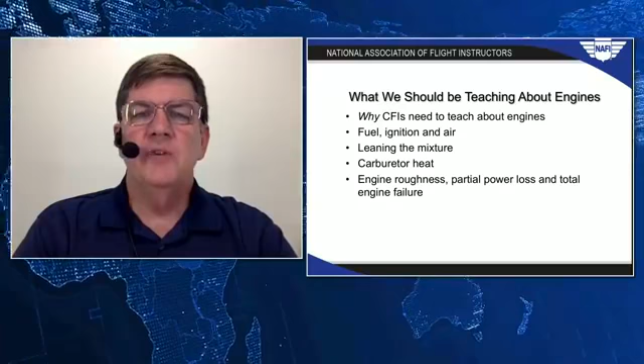In this webinar, we'll review the reasons why flight instructors need to teach students at all levels about engines and engine management. Specifically, we'll cover what engines need to run and how to get what they need, leaning for takeoff, climb, cruise, descent, and arrival, including high-density altitude conditions, using carburetor heat, including the unusual initial results of carburetor heat use, and how to properly respond to engine roughness, partial power loss, and total engine failure in flight.

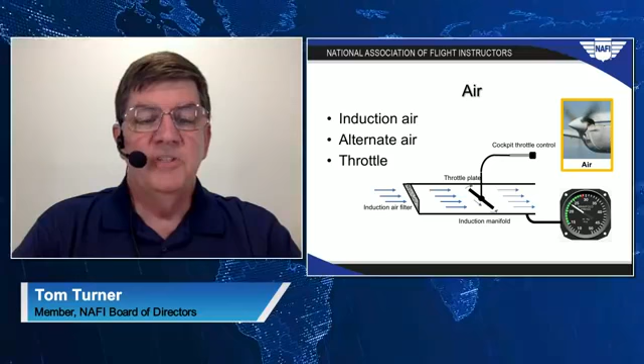The cockpit throttle control moves a throttle plate in the induction system. The position of this plate determines how much induction air is sent to the cylinders for combustion. We talk about opening and closing the throttle.

When the throttle is fully forward to wide open, the throttle plate aligns with the airflow and lets almost all of the air pass toward the cylinders. When the throttle is closed, the plate blocks the airflow almost completely.

The amount of air sent to the cylinders is the main means of controlling the engine's power output. If the airplane has a manifold pressure gauge, the gauge measures the air pressure in the induction system as changed by the throttle position, and it is the primary means of indicating power selection. As long as the fuel flow is correct for the amount of air in the cylinders, we'll talk about mixture control shortly, the engine will develop power.

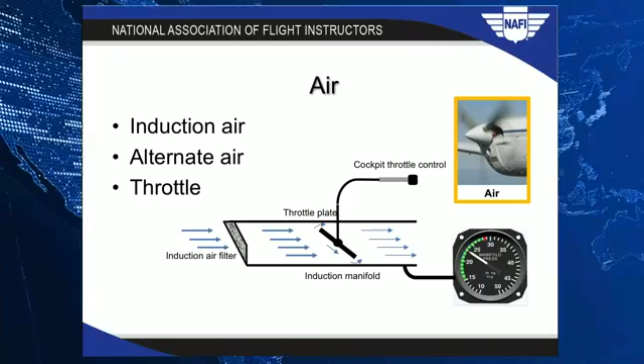In carbureted engines, carburetor heat is a form of alternate air. Carb heat takes hot air from the engine exhaust and emits it into the induction manifold ahead of the throttle plate. Carb heat is designed to prevent formation of ice on the throttle plate and, to a lesser extent, to melt ice off the throttle plate if it has already formed.

Because heated exhaust air is less dense than cooler ambient air, when you apply carb heat, you're reducing the amount of air available for combustion. That's why the power drops when you apply carb heat in your pre-flight check. We'll cover the use of carb heat and the indications that result later in this program.

The ignition system provides the spark that ignites the fuel air charge in the cylinders. Magnetos are mechanical devices attached to the engine accessory case. As they spin, they create short electrical pulses that travel down wires called the harness to the individual spark plugs in the cylinders. The timing of these sparks is set to follow a pattern

that alternates between cylinders and occurs at a time in each cylinder's power stroke, so it ignites the fuel and air at the optimum time.

Magnetos do not need the airplane's electrical system in order to generate spark. As long as the engine is turning, the magnetos fire the spark plugs. This is usually done with a battery-operated or pneumatic engine starter to get started, but it's also how some small engines can be propped by hand to get the ignition started.

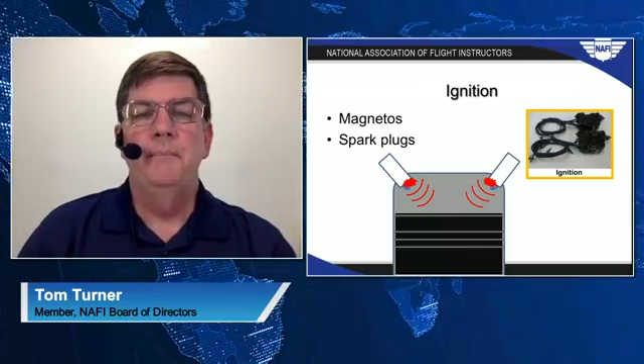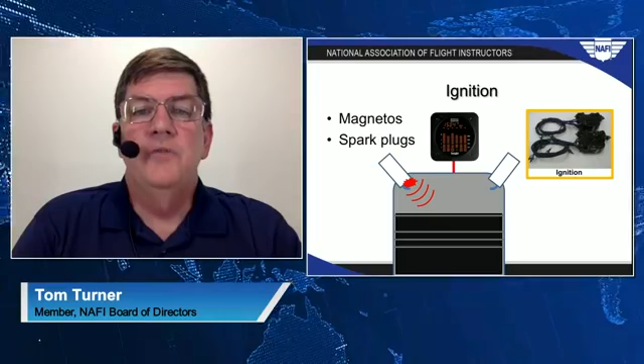If the airplane has all-cylinder monitoring, you can check the ignition system during engine run-up even more precisely. When you turn off one magneto, check that the exhaust gas temperature column remains illuminated for each cylinder. If one cylinder goes dark, that means the spark plug in that cylinder is not working. This may or may not cause engine roughness or an excessive RPM drop, so you might not see it otherwise.

There's another way to check the proper operation of the ignition during the magneto check. When you move from both magnetos to a single magneto position, all of the cylinders' exhaust gas temperatures will increase.

Now, why would the temperature go up when the engine is less efficient? It's precisely that loss of efficiency that creates this indication. With only one spark plug firing in a cylinder, there is only one flame front as the fuel and air burn. It takes longer for all of the fuel and air to burn, and is not complete when the cylinder's exhaust valve opens. The fire is still burning as the exhaust passes the exhaust gas temperature probe, so it creates a false high reading on the panel gauge.

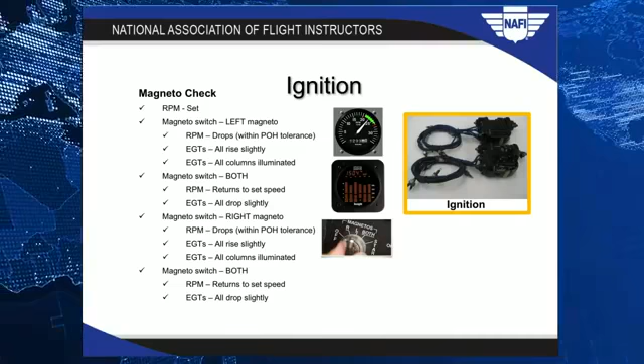There are some spark plug failures that only happen at high temperatures, so it's also a good operating practice to occasionally do a magneto check in flight at cruise power. This can help you find an impending ignition problem your student can take to his or her mechanic before it leads to delaying or canceling a flight.

Magnetos have been used in airplane engines for over a century. They are a proven technology and are extremely reliable, but it's possible to get even more power or efficiency by varying the ignition timing for different phases of flight.

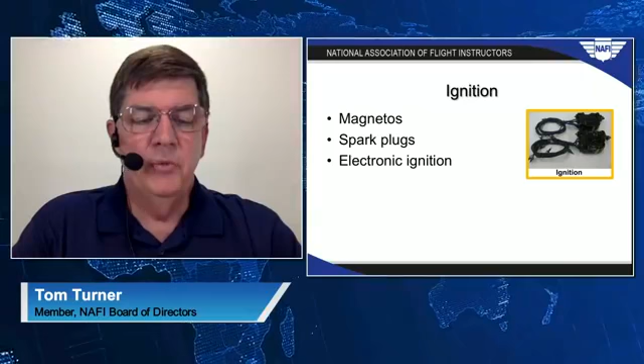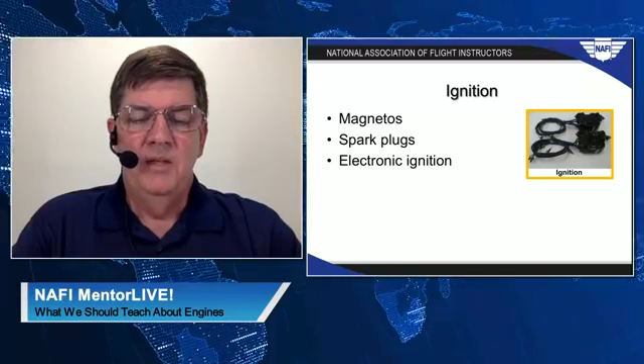Electronic ignition systems are now available as modifications to several types of engines. Most require retaining one traditional magneto for redundancy because electronic systems require the airplane's electrical system to be working, and you need a backup to keep the engine running if you have an alternator or battery problem. Some electronic systems need a magneto to start the engine too. Electronic ignition systems have unique operating procedures and tests that you'll need to find in the applicable Systems Pilot Operating Handbook supplement so you can teach them to your student.

Your airplane's engine needs three things to develop power: fuel, air, and a source of ignition. Summing it up in this simple way will make it easier for you to teach what you need to do if an engine runs roughly, there is a partial loss of power, or if the engine quits completely. We'll cover teaching these procedures in a bit.

To be ready to teach these concepts to your students, you'll need to spend time researching the systems and procedures that apply to the specific airplane you'll fly. Focus on the limitations and systems description sections of the Pilot's Operating Handbook or Airplane Flight Manual, in addition to normal and emergency procedures checklists. You can learn more by contacting the Type Club for the airplane type you'll teach. See www.eaa.org/typeclubs for a list of aircraft type clubs.

Now let's see if we have any questions. I haven't seen any yet, have you? No, not as they come in, but actually I have a question, a couple of questions for you there, Tom, because I've been taking copious notes here as we've been going through this.

Can you explain a little bit more detail when we're talking about using the auxiliary fuel pump to cool the engine in a climb? Could you go a little bit more deeper on why that is?

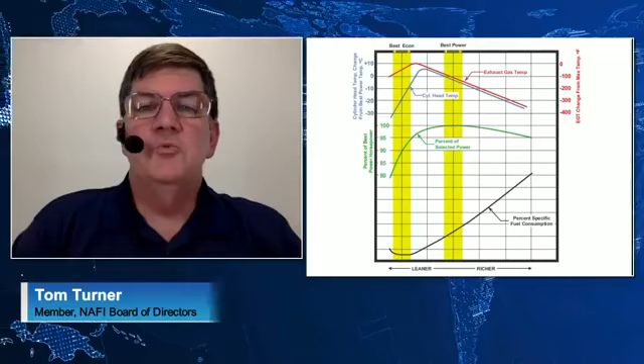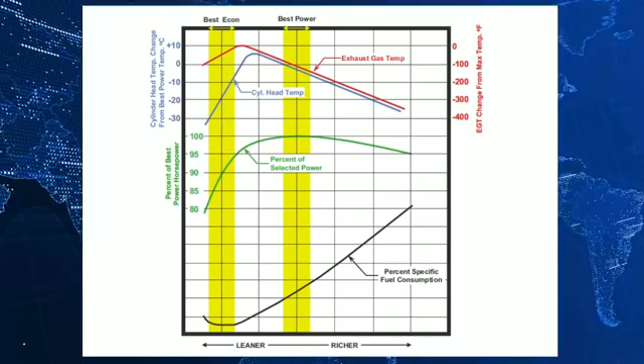Now, to illustrate mixture control's effects, we'll use this chart from Continental Motors. The relationships are valid regardless of the engine type. You may have seen versions of this graph from other sources as well. The basic chart was originally developed by Lycoming in the 1930s, I believe.

We'll read the chart based on the condition of the fuel-air ratio as noted at the bottom of the chart. Mixture settings to the right are richer, that is, more fuel per unit of air, while the mixture becomes progressively leaner as you move it to the left. As the mixture changes, there are corresponding and predictable changes in exhaust gas temperature, cylinder head temperature, power output, and specific fuel consumption. Each is plotted on the chart. We'll also cover how to detect these areas of engine operation if you do not have all of these engine instruments in the airplane you're using to teach.

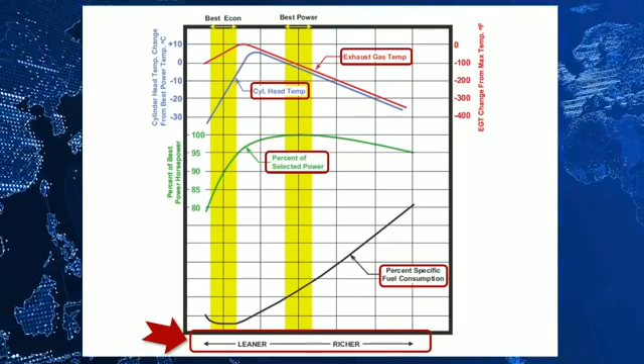Exhaust gas temperature serves as the basis for all mixture management. At full rich, the EGT will be fairly low. As you lean the mixture, the EGT will rise until at some point it reaches a maximum or peak temperature. Continue to lean farther and the EGT drops.

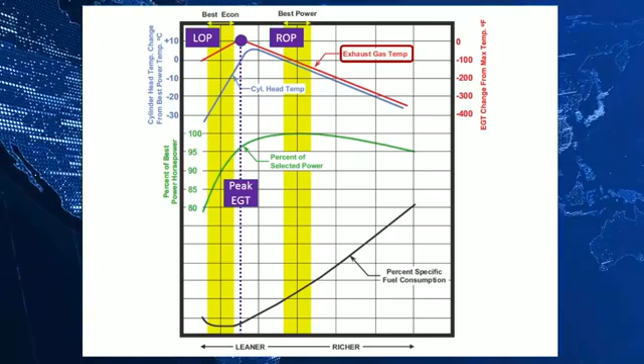Mixture settings at higher fuel flows than peak EGT are called rich of peak or ROP operation, while settings with less fuel than the peak point are called lean of peak or LOP modes.

Cylinder head temperature behaves similarly as you change mixture, with two interesting differences. First, the peak or maximum CHT occurs while still rich of peak EGT, about 40 degrees Fahrenheit rich of peak. Second, before reaching peak EGT, the CHT begins to drop, much more rapidly than it does at richer mixture settings.

In fact, to obtain a CHT roughly 15 degrees Fahrenheit below peak CHT, you need to reduce fuel only slightly to reach peak EGT, but you must enrich fuel flow nearly 4 times as much on the rich side of peak EGT, as noted by the red asterisks on the CHT curve.

This is one reason many pilots like to fly lean of peak if it works for their engine and meets other goals. CHTs run cooler while burning less fuel.

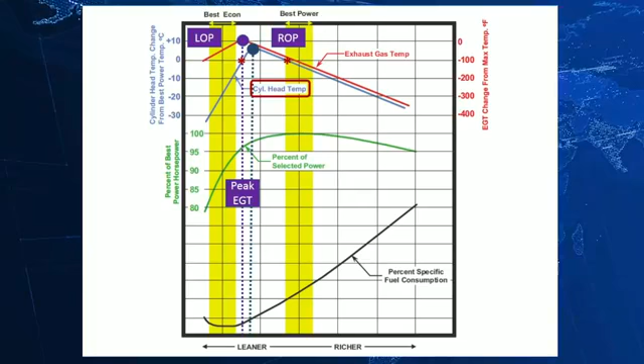Power development is directly affected by mixture setting as well. Like EGT and CHT, the percentage of selected power increases as mixture is leaned away from full rich. Peak power development occurs at roughly 100 degrees Fahrenheit rich of peak EGT.

Because the horsepower curve is pretty flat near its peak point, anything from about 75 Fahrenheit to 125 Fahrenheit rich of peak results in about the same power output. That's why some sources state peak horsepower occurs at 75 or 80 degrees Fahrenheit rich of peak. It attains maximum horsepower at the lowest fuel flow.

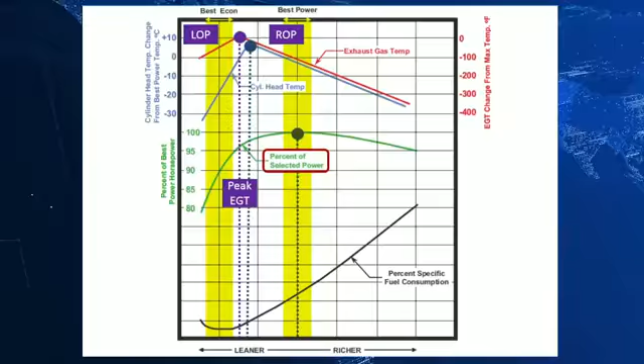Notice the power drops quickly even before you get to the peak exhaust gas temperature. Lean of peak EGT, even a small change in fuel flow results in a big drop in power output.

The peak horsepower setting is where RPM is greatest also. If you're using the engine tachometer as your leaning reference, you lean until RPM begins to drop, then enrich until it returns to its peak. That puts you at peak horsepower.

The rapid drop in power provides a clue as to why many engines run roughly on the lean side of peak EGT. This chart assumes all cylinders reach their individual peak points at exactly the same time.

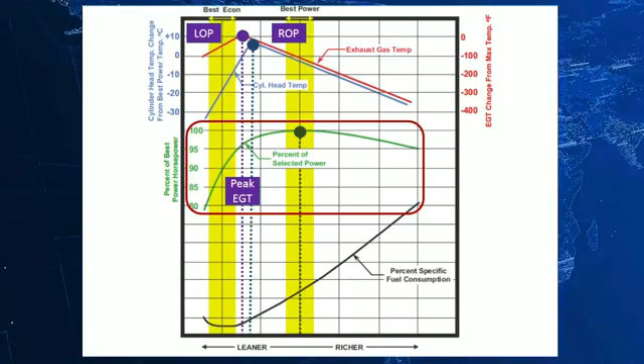No mixture setting puts all cylinders of your engine at precisely the same spot on their individual performance curves. The reality is that each cylinder is on its own schedule and will reach its individual peak at a different time.

Rich of peak EGT, this is not as noticeable because the power output of each cylinder is roughly equal even when the cylinders are not at the same point. At settings leaner than maximum horsepower, however, and especially when lean of peak EGT, even a small difference between cylinders creates a big difference in power developed.

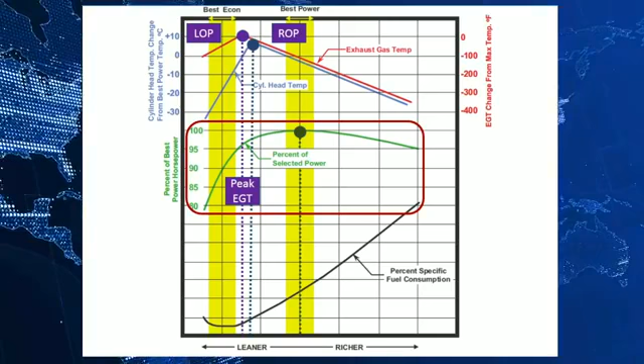Cylinders running at different power settings will create vibration and roughness that degrades performance and is noticeable in the cabin.

Specific fuel consumption is a measure of efficiency, the amount of fuel burned per unit of horsepower. At rich of peak fuel flows, as the name implies, fuel consumption is high. It's not as efficient, and the richer you get, the less efficient it becomes.

Specific fuel consumption flattens out just lean of peak EGT and remains there until roughly 50 degrees Fahrenheit lean of peak. From there, the specific consumption again rises. Combustion becomes less efficient even as power production drops.

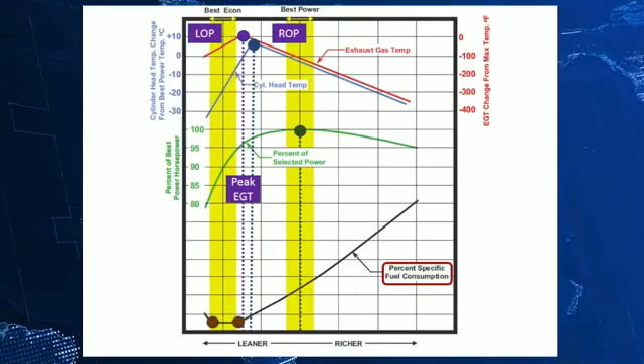These relationships provide some general guidelines for mixture control. For best economy, sometimes called a go-far mode, and assuming the engine runs smoothly lean of peak, operate at about 10 to 50 degrees Fahrenheit lean of peak EGT if your engine will do so.

Because you want all cylinders to be on the lean side of peak for this economy, you'll use the last cylinder to reach its individual peak EGT as the reference for this leaning. If instead you want best power, the go fast mode, set the fuel for 75 to 100 degrees Fahrenheit rich of peak EGT, using the first cylinder to peak as your leaning reference.

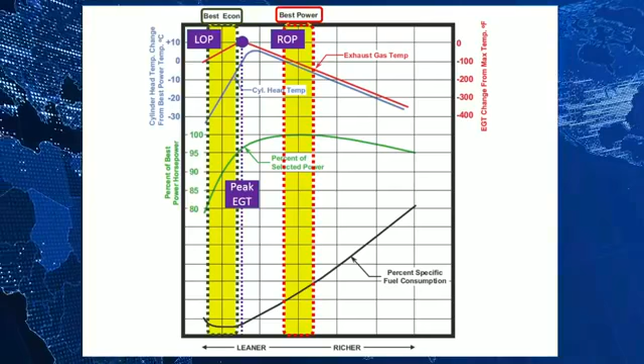Let's look more closely at the best economy setting. We choose best economy because the specific fuel consumption is low. As a result of this setting, only about 90% of our selected power is available. Because the engine is creating less power, it also creates less heat, and therefore the cylinder head temperatures are far below their maximum. This can be important for you to know when you teach in high-performance airplanes.

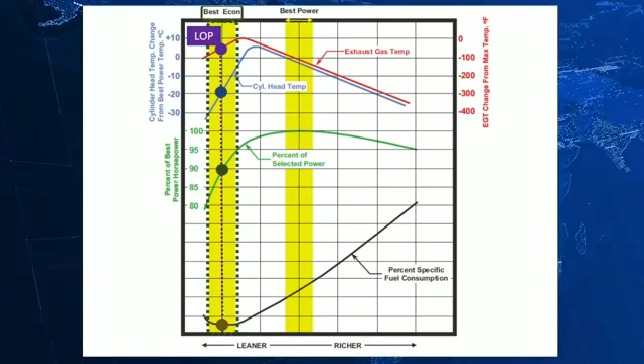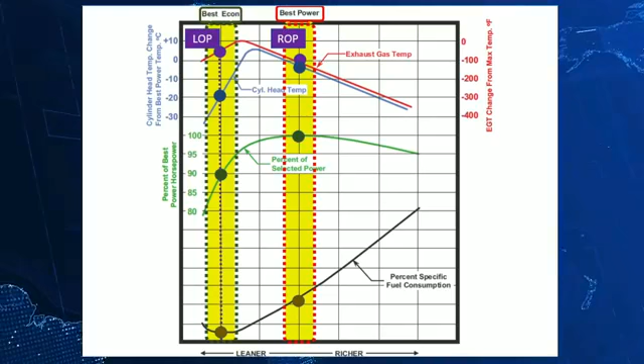By contrast, the best power mixture setting burns significantly more fuel, but it creates a lot more power, 10% more than best economy as a result. For a given combination of manifold pressure and RPM, a best power mixture usually results in several knots faster true airspeed than best economy. Because of the greater power output, the CHTs are higher at best power also, but this is tempered somewhat by the increase in cooling airflow that results from the faster indicated airspeed that results.

Most airplane handbooks and manuals recommend operating somewhere between best power and best economy mixture settings as a compromise between the two. This is fine as long as the engine runs smoothly and the selected power setting is not so high the engine runs excessively hot.

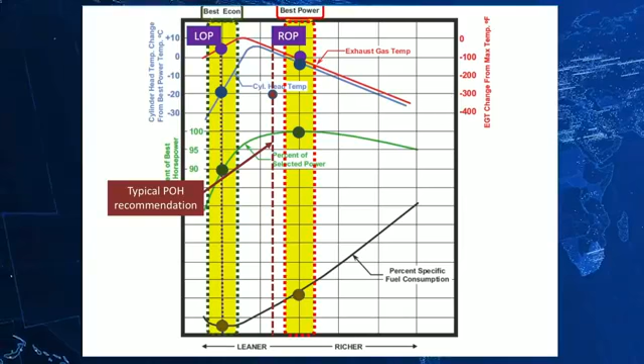Remember how we usually teach leaning the mixture in primary training airplanes? Lean until the engine begins to run rough, then enrichen until it smooths out. Look at the chart and visualize where this occurs. Somewhere lean of peak horsepower, the engine will begin to run rough as the individual cylinder power development varies. When you enrichen back until the cylinders are all on the flat part of the horsepower curve, the engine smooths out. You're probably somewhere between peak EGT and the best power setting, even if you don't have the cockpit instrumentation to see it directly.

Most student pilots have the luxury of ignoring mixture control for takeoff and climb. At low elevation airports, and when only climbing a few thousand feet above the ground, it's normal to put the mixture control in the full rich position for engine start and leave it there until leveling off in cruise, if they adjust the mixture even then.

On a hot day, however, even fairly low elevation airports will have density altitudes above 4,000 feet or so, high enough you'll need to lean to get best power for takeoff.

Whether during training, or after your work is done with a pilot, there will come the day when your student will need to lean for maximum power for takeoff at a high density altitude, and continue to lean the mixture for maximum power during climb. How do you teach your students to do that?

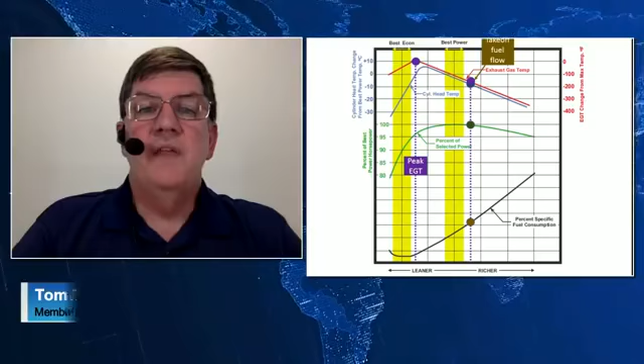The takeoff fuel flow prescribed by most flight manuals results in a roughly 200-degree Fahrenheit rich of peak mixture setting. This equates to the factory maximum fuel flow at sea level, adjusted for an increase in altitude. This results in near maximum horsepower just before the point where richer mixtures cause power output to drop. CHTs will be well below peak as a result of fuel retarding combustion. Of course, the fuel consumption is high, but this is the cost of taking off.

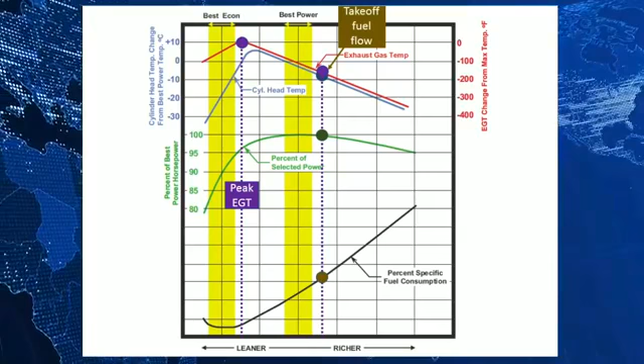Some airplanes' fuel pressure or fuel flow gauges include target fuel flows for takeoff at various altitudes. This fuel flow will result in the recommended takeoff and climb mixture setting for that altitude. Advance the throttle to full, then lean the mixture until the indicated fuel flow matches the reference for the pressure altitude. Notice that each reference is a bracket or range of fuel flows. Use the high end of the appropriate altitude reference for takeoff. As you climb, periodically lean to keep the fuel flow within the range for your current altitude.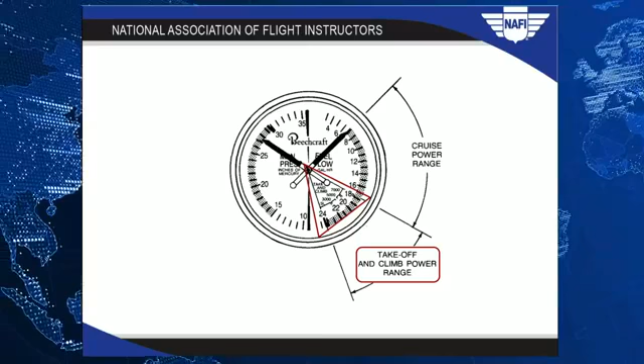If your engine has an exhaust gas temperature gauge, note its approximate reading when you have leaned for takeoff power using other techniques. You'll find that this temperature is consistent for most engines at takeoff manifold pressure and/or RPM, regardless of altitude. Once you know the target EGT for your engine, you can go to takeoff throttle and RPM and simply lean until the EGT reads this target value to get the correct mixture for takeoff. Occasionally lean the mixture more to keep the EGT at this target value as you climb.

If you're using propeller speed as your leaning reference, go to full throttle and begin to lean the mixture. The RPM will probably increase at first as you get closer to the best power setting. Continue to lean until the RPM begins to drop, then enrichen until RPM peaks again. Enrichen a little bit more as long as the RPM does not again drop for that little extra fuel needed to assist in temperature control.

After takeoff, and once you establish climb speed, when a fixed pitch propeller will usually reach a higher RPM, carefully lean again for maximum propeller speed. As you climb, occasionally lean the mixture further to keep the propeller at this maximum RPM.

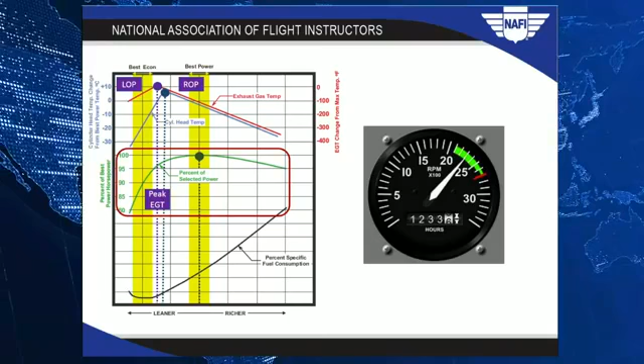When should you set the mixture for density altitude takeoff? One technique is to pause momentarily after taking the runway for takeoff, advance the throttle to full, lean for takeoff power, then release the brakes and go.

I prefer to have more time to set mixture properly and spend less time in position on the runway, especially at non-towered airports. When doing the engine run-up, I'll briefly go to full throttle and adjust the mixture for takeoff there. Then I leave the mixture control in that position when I reduce throttle at the end of my run-up and as I taxi into position. Now the mixture is in the right place for takeoff power when I return the throttle to full. Advance the power, quickly cross-check the cockpit indications for maximum power, and then release the brakes.

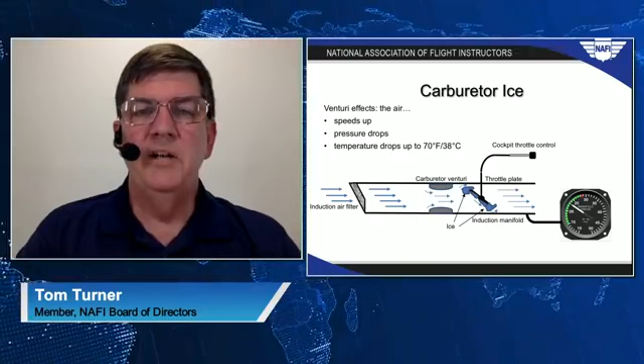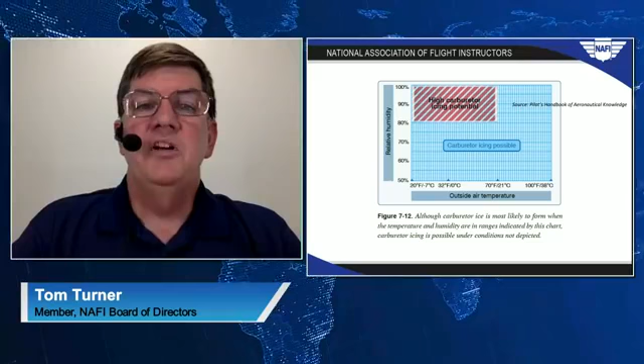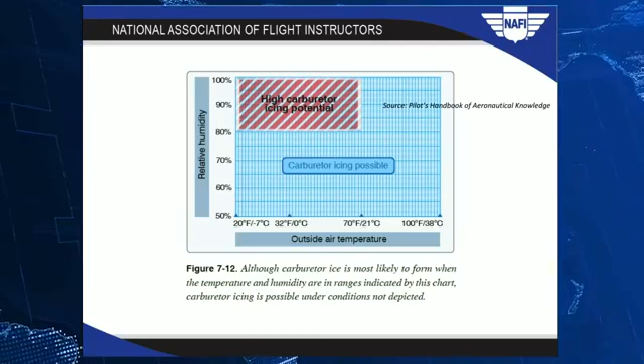Warmer air can suspend more water vapor than cold air, so warmer air is generally more moist. Because moisture is available, and because carburetor air temperature drops up to 70 degrees, carburetor ice can occur even in warm to hot outside air temperatures. The highest potential for carb ice is when temperatures are from about 20 degrees Fahrenheit, or 7 below Celsius, to as high as 70 degrees Fahrenheit, or 21 C, with relative humidity greater than 80%. Colder than this range, and there is probably not enough moisture in the air to create ice. Carb ice is less likely, but it's still possible at lower relative humidity and temperatures as hot as 100 degrees Fahrenheit, or 38 C.

Carburetor heat is designed primarily to prevent the formation of carb ice. It has a more limited ability to remove carb ice that is already formed. When you apply carburetor heat, you are moving a valve that ducts hot exhaust gas into the induction manifold. Exhaust air is hot enough that carb ice will not form. But because hot air is less dense, it results in a power loss.

Remember, that's how you check to see if it's working during the before-takeoff engine run-up. Carb heat is less effective in removing ice that is already formed, in part because it may take a lot of heat to melt the ice, and in part because the ice may have already created enough of a power loss that there's not a lot of exhaust gas left to warm the induction system.

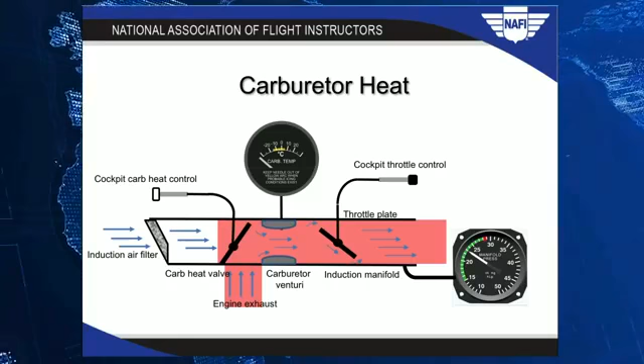Generally, you use carb heat as an all-or-nothing control. Pull it on fully when icing conditions are likely, and off when it's not needed. Some airplanes have carburetor temperature gauges. If the airplane you're teaching in is so equipped, and assuming it is calibrated properly, you can apply just enough carb heat to get the indicated temperature above freezing. This reduces the amount of power loss that results from using carburetor heat.

Unless the pilot's operating handbook suggests otherwise, standard practice is to apply full carburetor heat as a preventive measure anytime you reduce power below about 2,000 RPM and when in the traffic pattern for landing.

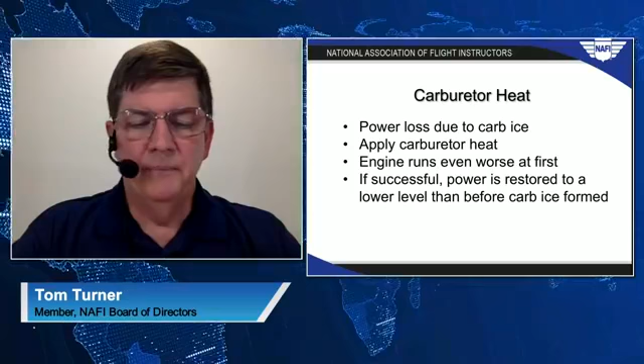If the engine develops carburetor icing and runs roughly or power drops, and you apply carburetor heat to remove it, the indications might not be what you would expect. As soon as you apply carb heat and hot air enters the induction system, the engine will run even rougher and power will drop even more because of the effect of the less dense air. Your initial response might be to remove the carb heat, but that's the wrong thing to do. Be patient, because if carb heat is going to work, it's going to take time, and it'll get worse before it gets better.

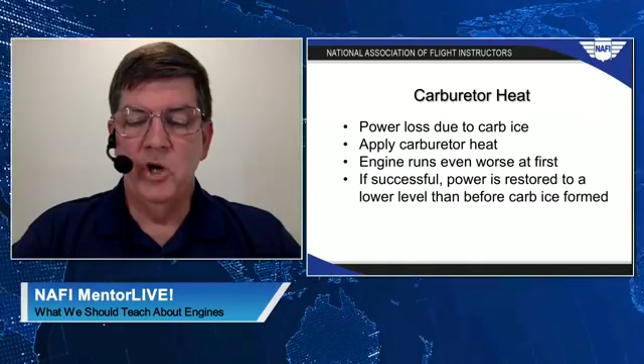If carburetor heat is successful at melting away the ice, power will return, but it won't be as strong as it was before the carb ice formed, again because now you're running on less dense air. However, you should keep the carb heat on to prevent ice from forming again. And because the amount of air in the engine has changed, you'll need to re-lean the mixture as well.

This leads to our last topic for tonight: guidelines for dealing with engine roughness, partial power loss, or total engine failure.

In any type of engine emergency, your first response should always be to simply fly the airplane. Maintain control, establish the appropriate speed, whether that be best glide in a single engine airplane, blue line in a twin, or some higher speed if the airplane still has enough power to maintain altitude at that higher airspeed.

As soon as airplane control is assured and you are at or trending toward the proper airspeed, aim the airplane somewhere that will result in the best possible outcome. Close to the ground, this probably means pushing the nose down to a landing attitude and then flaring for an off-airport landing. In a twin, you may be able to aim up if the single engine control and performance permits. In all cases, point the airplane in the direction of the most suitable landing available as a result of your altitude and the amount of power remaining.

For purposes of this presentation, we'll assume the power emergency takes place at a high enough altitude that you have enough time to attempt an engine restart. Your first response to an engine problem then is to fly the airplane and then aim somewhere.

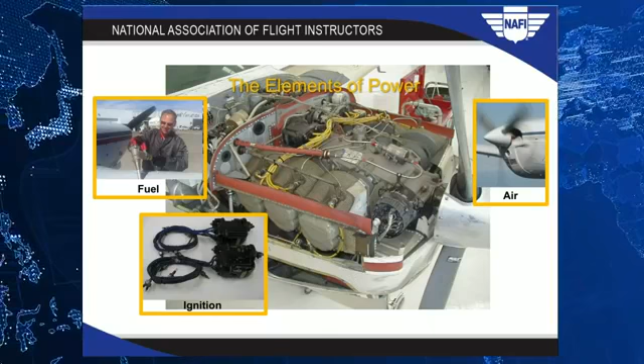Always check against the emergency checklist for the specific airplane you're teaching. You'll probably find, however, that all engine roughness, power loss, and total engine failure checklists follow these same basic steps. There's only one procedure your student needs to memorize and practice. This helps you a lot as an instructor also. The same basic procedure applies to almost any airplane you fly.

Engine restart consists of checking and adjusting the engine's fuel, air, and ignition systems. In a carbureted engine, your first step is to apply full carburetor heat. Carb ice is a common cause of engine roughness, partial power loss, and even total engine failure in carbureted engines. So carb heat stands the best chance of restoring lost power. You also do this first while you still have ample heat in the exhaust system to melt carb ice. Apply full carburetor heat, remembering that the engine will sound and work even worse at first and improve only after ice melts off the throttle.

Next, verify the fuel is turned on. If so, most airplane manuals suggest switching to a different main fuel tank. Fuel starvation, that is, running a fuel tank dry while there is still fuel available in another tank, is a very common accident scenario. If that doesn't work and the airplane has an auxiliary fuel pump, turn it on consistent with that airplane's handbook instruction. Also, move the mixture control to full rich. Full rich might not be the most efficient place to run the engine, but the engine should run at least some in the full rich position.

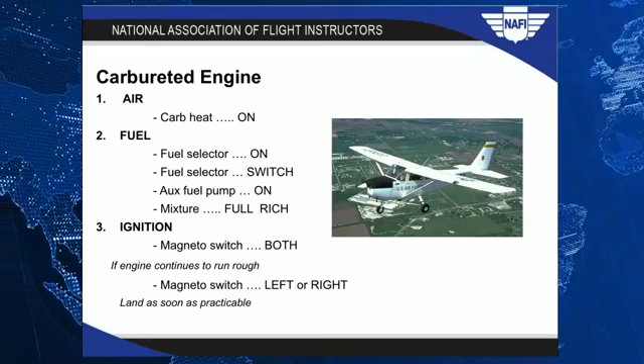Engine restart in fuel-injected engines also consists of checking and adjusting the engine's fuel, air, and ignition systems, but in a different order. Historically, engine failures in fuel-injected airplanes are most commonly caused by fuel issues.

So start by selecting a different main fuel tank. If that doesn't restore power, turn on the auxiliary fuel pump consistent with the airplane's manual. Also, move the mixture control to full rich, except in turbocharged airplanes.

A turbocharged or turbo-normalized engine delivers a lot of extra fuel to support its boosted manifold pressure. If the engine quits, the fuel pump may still be providing full fuel flow, which without turbo boost will flood the engine. In turbo engines then, pull the mixture to idle cutoff and then advance the mixture slowly to see if the power will be restored.

If the engine relights, you can then advance the mixture further if the turbocharger resumes boosting the air, or leave the mixture where it supports combustion if the turbo doesn't return. Just like carbureted engines, if power is not restored or the engine continues to run rough, check that the magnetos are on both, then try the left and right position to see if smooth power returns. Lastly, activate an alternate air source.

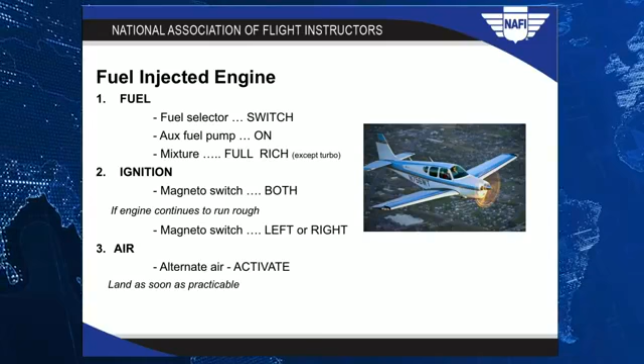This is usually automatic in fuel-injected airplanes, which is why you can save it to be the last item on your engine restart checklist. In all cases, unless switching fuel tanks restores power and you have sufficient fuel in that tank to fly to your destination with adequate reserves, land the airplane and get it checked. So in fuel-injected engines, fly the airplane, aim somewhere, and then check fuel, ignition, and air.

So regardless of your airplane type, if you experience a rough running engine, partial power loss, or total engine failure, fly the airplane under control toward an acceptable landing. Then as time permits, adjust the fuel, ignition, and air controls to try to get it running smoothly again. If you do these things and power does not return, there's nothing you can do from the pilot seat to get the engine running again. In that case, establish your best glide for landing in a single engine airplane, or feather the dead engine's propeller and transition to single engine flight in a twin.

The order in which you do these steps varies by the engine type and equipment, and may be modified by the pilot's operating handbook or airplane flight manual for the specific aircraft. But if all you teach your students about engine restarts is fuel, ignition, and air, it will be easy for them to remember the restart attempt steps in virtually any airplane they'll ever fly.

In this webinar, we've covered a lot of material. We've covered the reasons why flight instructors need to teach students on all levels about engines and engine management, what engines need to run and how they get what they need, leaning for takeoff, climb, cruise, descent, and some for arrival, including high density altitude conditions, using carburetor heat, including the unusual initial results of its use, and how to properly respond to engine roughness, partial power loss, and total engine failure. There's a lot more we instructors are responsible for teaching pilots about the operation of their engines, but this is a good overview of some of the most important items that are not routinely covered in pilot training.